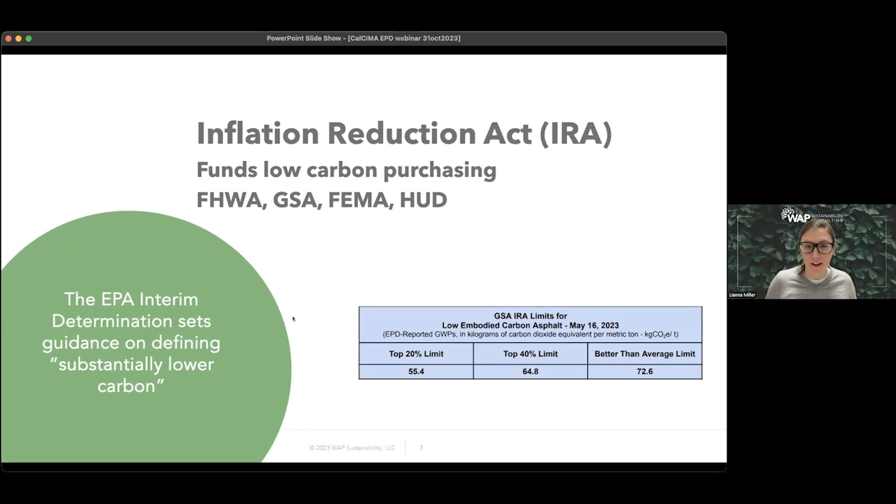Yeah, nailed it. Exactly. So let's talk about how you actually get data in. There's kind of two parts to this topic. I'm going to walk you through the Emerald Eco label for asphalt. And in order to participate in the benchmarking study, you only have to do the first part of it. Like, let's say the whole process is this long, you're doing just this first third. We'll walk through it specifically today. But first, just a little bit about the ecosystem of EPDs.

You've got these different ingredients going into products, pavement products. For an asphalt, you're going to have a binder and an aggregate. Now, ideally, you will have specific data about that binder or that aggregate. Like, okay, I have a nutrition label for my aggregate, right? I went to my aggregate producer, they have an EPD, I can put it into my own system and get a more specific number. You could almost think, if we're going back to that idea of the Snickers bar, gee, this is actually a pretty good one. So let's say that the binder is the chocolate and the aggregate is the peanuts.

Then you can use standardized data, which is what most folks have. It's built into the tool. But if you have specific EPDs, you can get an EPD specifically for the peanuts, right? For the aggregate, or you can use the average.

I have no idea why this went all the way to the end. So again, I'm sorry. Thanks for your patience. Hold on 30 seconds while I fix a technical issue. Okay, hopefully we are all seeing my screen again.

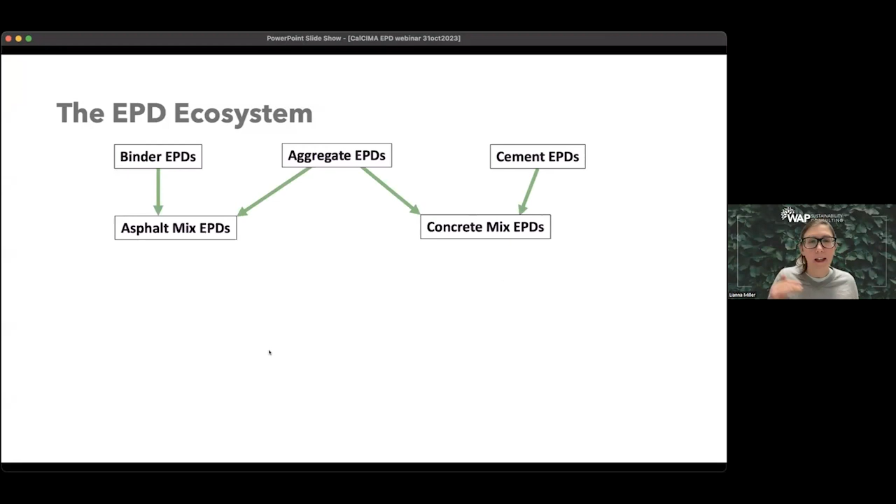Sorry about that. Okay, so what we have is this ecosystem of what goes into an EPD and where these all get used. I'm going somewhere with this, I promise, because the next thing is this data feeds into the different pavement materials which are providing EPDs, right? If you're being asked by your state agency or by FHWA to provide an EPD for a product, it's usually at this mix level product. Those EPDs are then, and this is where it gets fun, and you don't have to stress a whole bunch about it, but they go into a number of different databases.

Right now, asphalt mix EPDs are all available once they're published, and you choose when to publish. But once they're published, they're available on NAPA's site, and those can then get integrated into your DOT or your customer, whoever that is. And then they're making procurement decisions now at this point based on what they're seeing in the asphalt mix EPDs.

And so, Lianna, just a quick question. You said when they're published, so you can participate in the federal study without publishing. Oh, yeah. You can participate. What's our deadline on that? I believe that we are closing the second round of data collection... You know what? Let's just say the new year. And if I'm wrong, it'll be after that. There may be a little bit more time after that, but great. All right. Sorry to distract.

Oh, but no, please, that publishing thing is critical. I had several producers that wanted to participate in the data, but weren't ready to publish for whatever their business model reason is, which is always valid, right? Yeah. And that's okay. But getting the data in is what's important. They can choose when they want to publish later. So back to you, Lianna. Totally. Yep. I'm glad you brought that up. There is zero requirement to publish an EPD in order to participate in the benchmarking program. Things you don't have to do for the benchmarking program: you don't have to pay any money, you don't have to even be a NAPA member, and you don't have to publish an EPD.

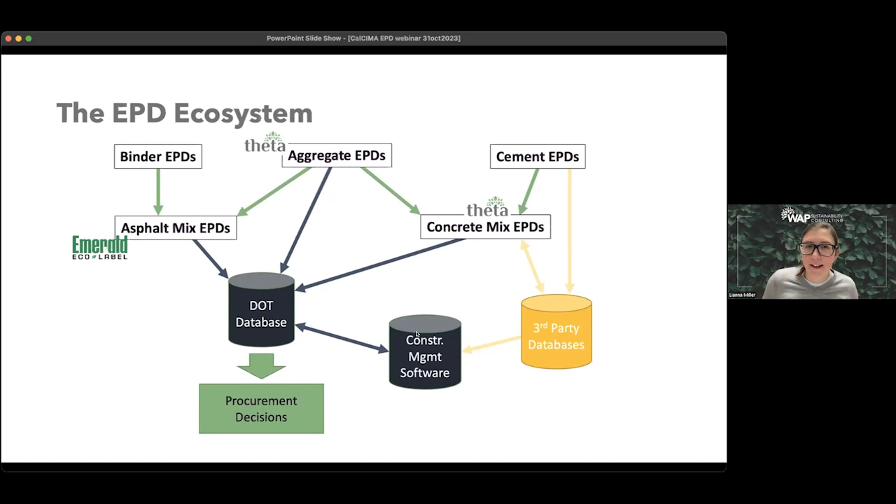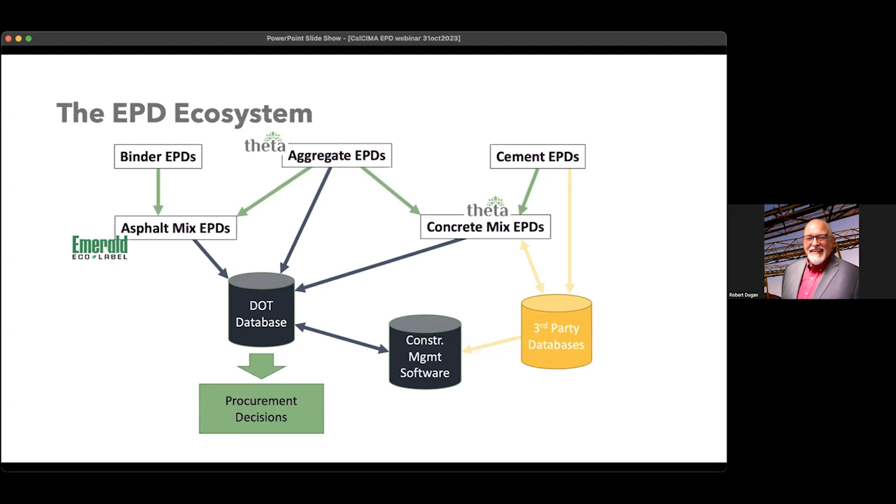But I'm assuming there are some folks in here that are from integrated companies. We do have a lot of fully integrated companies. For this webinar, we're focused on asphalt, but several of our companies are in all of the above. Well, cool. If you're in one of those groups, we can work with you on the other side.

So about the Emerald Eco Label, it is the tool to make asphalt EPDs. It is sponsored by NAPA. So they invested in this because they want asphalt to be able to make EPDs easily. It's pretty unusual that an association has created a tool, but it was a pretty good move on their part, I think.

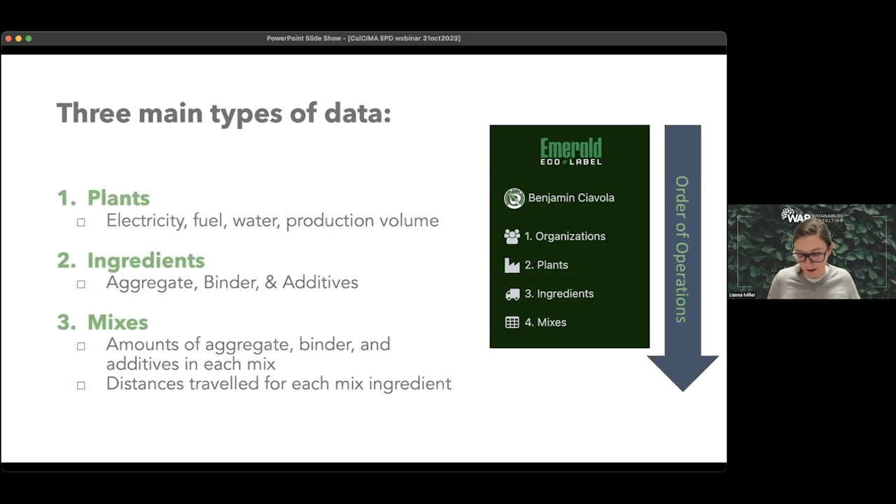So what we've done in making the Emerald Eco Label is we have done a bunch of iterations on this, simplifying the data input process to make it into terminology that you as an asphalt producer recognize, and using data you pretty much already have about your operation. You know, we're asking you for your fuel use, we're asking you for your energy use. You may have to dig around a little to get last year's numbers, let's say, but these are the kinds of things that you have. You don't have to go out and get a brand new measurement to get most of this put together. And we write it all in terminology that is familiar to you as an industry, and we don't ask any questions that we don't have to.

So there's that quote attributed to Einstein about just as simple as can be without being too simple, basically. I'm paraphrasing, but that's the idea, is we're going for that line of making it as reasonable as possible for you as an industry member, while still getting the appropriate data needed to do all the science behind this. But you do not have to be an LCA expert to do this, right? What you do need to know is asphalt operations, which you guys all know.

All right, so a little bit about when we're talking about the benchmarking side, why this big benchmarking effort. A little bit of life cycle terminology for y'all. We've got embodied carbon. This is a term that's been tossed around a lot lately. This is part of the total life cycle. So if we look at a life cycle of a product, we have its manufacturing, we have its transport, we have its installation or construction, we have its use, maybe some maintenance, more use, and then end of life or recycling, right? Embodied carbon is just the piece involved with the manufacturing, and upstream of it. So the ingredients that you use, what it takes to get that stuff to you, and then your production impacts.

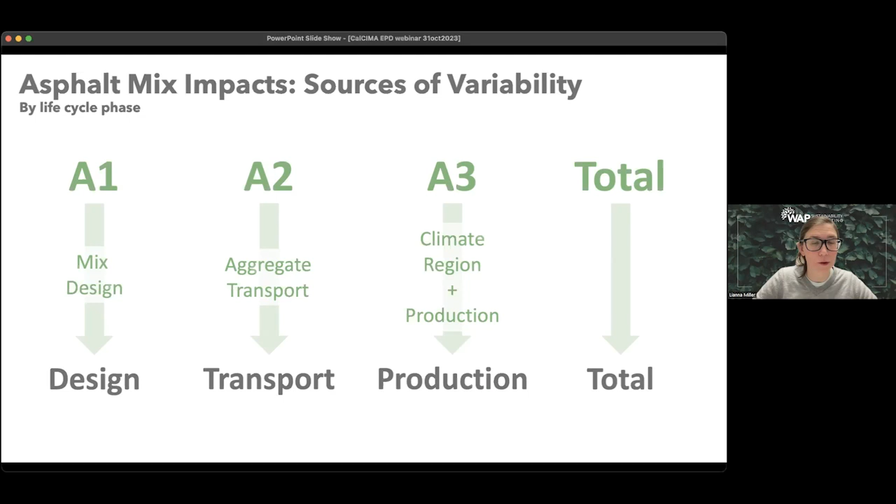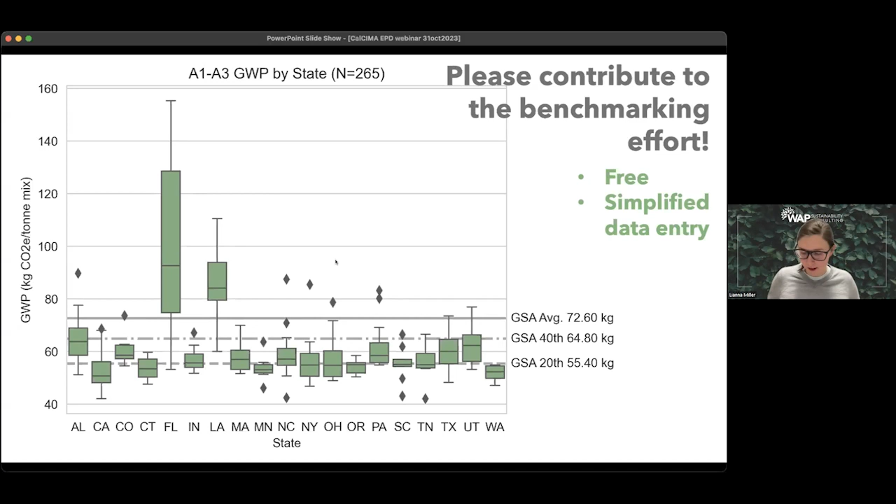It's because we have rules internally about when we have fewer than 3 participating organizations in a state, we don't visualize that data so as to protect specific data about an organization. So again, we have these limits in place to make sure that there's not a way that your sensitive data is revealed. Okay. So on to how one actually makes an EPD.

We follow this simple linear process of you enter information about your plant, your organization. That's kind of your metadata, right? Your company data, how do we get a hold of you, that sort of thing. And then it goes right into plant, and that's that fuel use, electricity grid, and so on. So all of that plant level data.

But what we are starting to do is, again, you saw it in that layout of the EPD ecosystem, we're starting to integrate specific EPDs from specific suppliers. And this is happening over on the concrete side with cement-specific EPDs, right? And they're including the specific cement supplier in order to create EPDs for concrete mix. So now we're doing the same thing over here. There's work happening on the asphalt binder side, and we're doing a lot of work on the aggregate side.

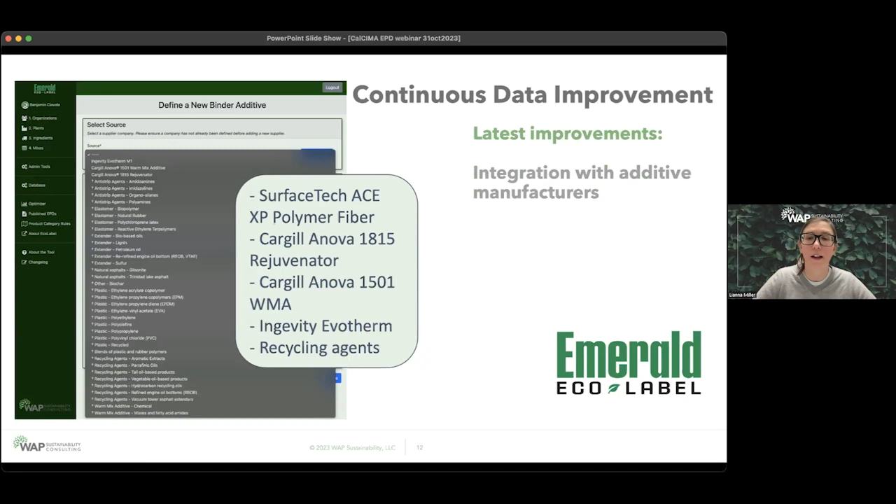So at the end of this, once you put in your plant data, your ingredient types, you put in the information about your mix, then you can preview your EPD and then choose to publish it. Once you choose to publish it, that EPD is verified.

There are additional quality controls within this whole system. Just to reassure you all, there is a lot going on in the back end to make sure that the data falls within normal bounds, that someone can't accidentally fat finger something. There's a lot of sanity checks in this, and then NAPA has a quality control assurance program as well. So if you publish an EPD, most of them are immediately available, but some of them may have to have a small pause while they go through the quality control program.

So, Lianna, if I could just ask a couple of quick questions. One of the questions we got asked is specific aggregate EPD data. So if you could slip that in as you go forward, that would be great. And then we know that in our industry, the oil industry has been a little bit slow to provide. So if you could address that at this point or somewhere in this part of your presentation, that'd be great.

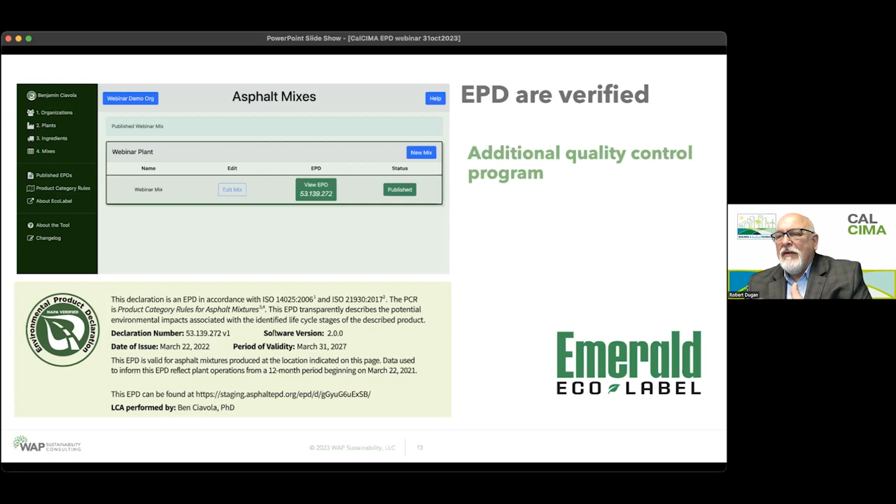Yeah, that is sort of the holy grail of the LCA world, is getting great data from petroleum products. There is a lot of work going on in there. It's imperfect, but what we do have is excellent primary data from the Asphalt Institute. They have provided sort of category data, if you will. So it's not product specific or terminal specific, but it is far better than just a generalized data set for asphalt binder.

So they've made a big investment of creating LCA data for several different major types of asphalt binders, notably SBS modification, and there's a couple of neat binders. So I will say we are all excited to have more data on that. But I am very glad that you brought up the point of aggregate EPDs, because this has been my project for the last 2 years. I'm very excited about it, so I'll talk about that next.

But first, I just want to point out a few things about the verification. Verification happens third party. This whole software is verified. It makes sure that all the data entry is simplified and follows the particular PCR. Remember those product category rules that NAPA put together? That all gets updated every 5 years. So we then go in and update the software so that your EPDs will automatically meet the new PCR requirements. So there is a lot of effort going on in the background to make sure the quality is there.

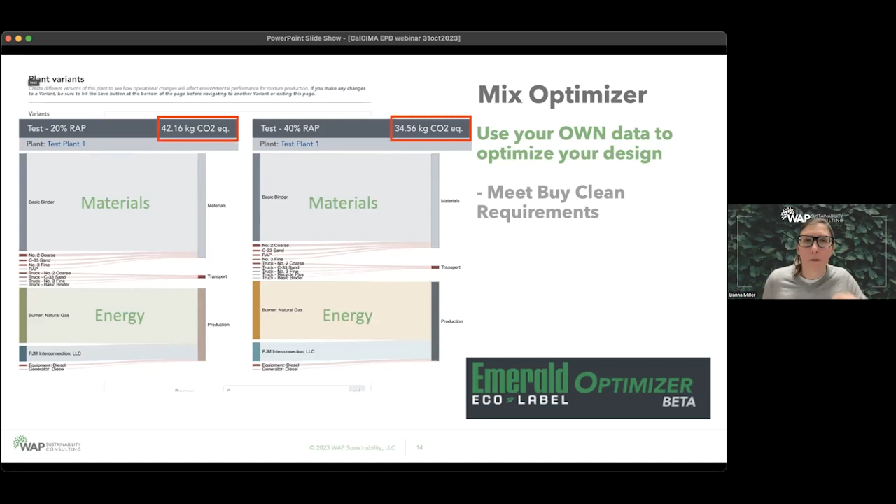So why do this? Especially, why participate in the benchmarking? It's free to you. It's a better picture of your industry. You don't have to be a member. Your data is private. The only person who can see it is myself and Ben. But you are participating in that transparency.

A ton of effort has gone into the upstream to make sure that this meets agency recommendations for, say, public data. This is a big thing with agencies. Public data, meaning those average data sets that we use, say for the binder, or maybe some average data sets for transport. Those are all public data instead of a privately owned database. A whole bunch of quality control and confirming that this all meets the product category rules. This is all built into the Emerald Eco Label tool.

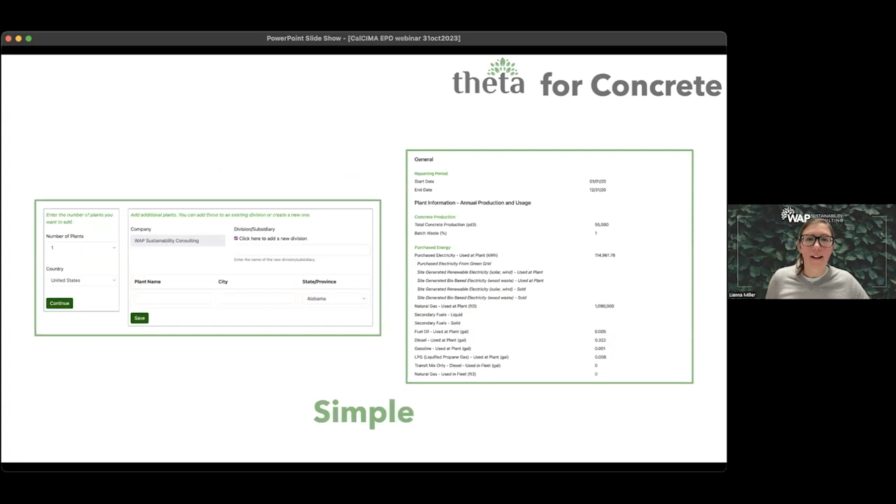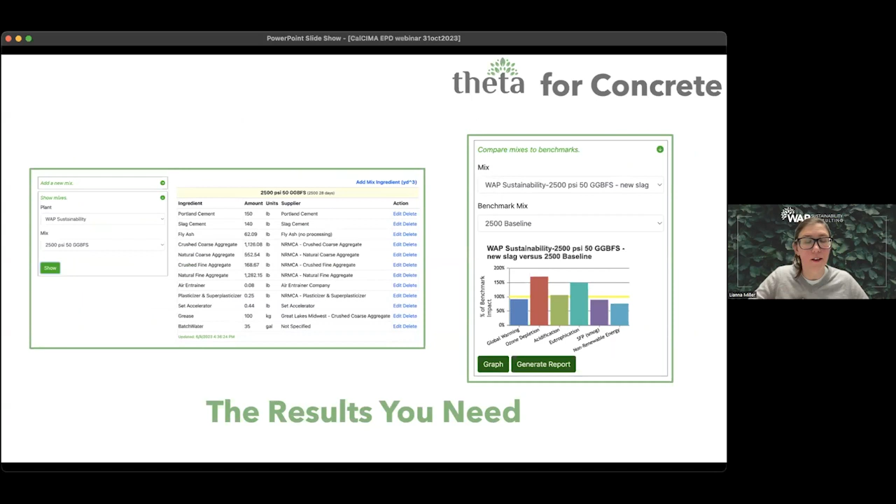Same thing for concrete. So my friends over on the concrete side, I stole their slides. But the idea is just the same. Again, putting in information about your operation. It's simplified. It's all in terms you know. You get out your results, your impacts associated with your mix design, in a format that folks are used to seeing. This EPD nutrition label, like right here. I love this image. This gives you an idea of what an EPD looks like, or at least the core part.

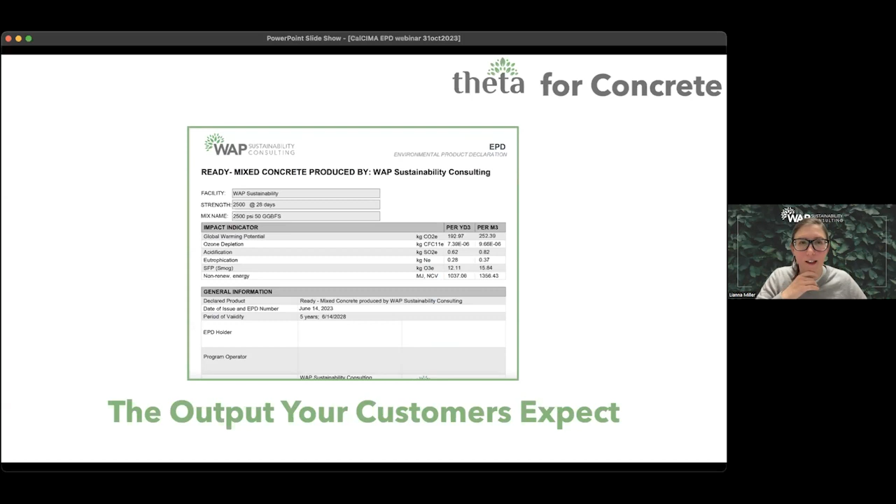This is that nutrition label portion of it. Global warming potential per unit of product. This happens to be concrete. I apologize, I should have included an asphalt screenshot as well.

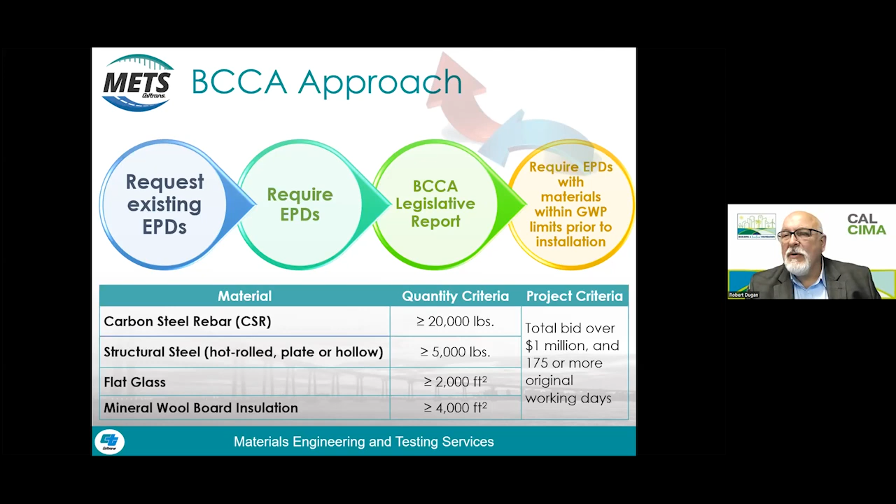Thank you, Robert. All right. So like I said, those materials aren't asphalt or concrete, but we like the approach. And so as we're looking at additional materials that we're adding, not legislated, just as a department looking to implement EPDs on our projects, we liked those approaches, those things we felt were successful, and we would like to continue that for any new materials that we incorporate into our projects.

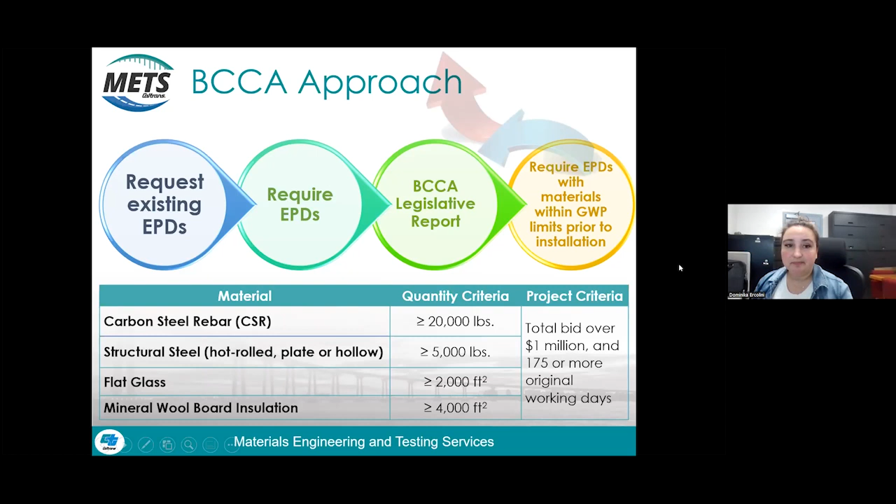Another thing that we would continue to incorporate from what we learned in the Buy Clean California Act is our data collection system. For those that aren't familiar, we have an online database called DIME. And that is where we currently collect all of our EPD data.

And there's really 2 times that a fabricator would go into the system. One, to input the EPD data, and the second time would be once they're actually doing quantity. So if they're actually shipping rebar, they put in their quantity and which EPD belongs to that. And so we would continue to do that with any new materials that we add as a requirement in our specifications.

So now we get into our 2019 pilot projects. In 2019, we did 7 materials. We did the structural steel, carbon steel rebar, mineral wool board insulation and flat glass, like in the Buy Clean California Act. But then we also added 3 materials: concrete, asphalt, and aggregate. Those were self-piloted materials, and they were selected because they're high volume construction materials.

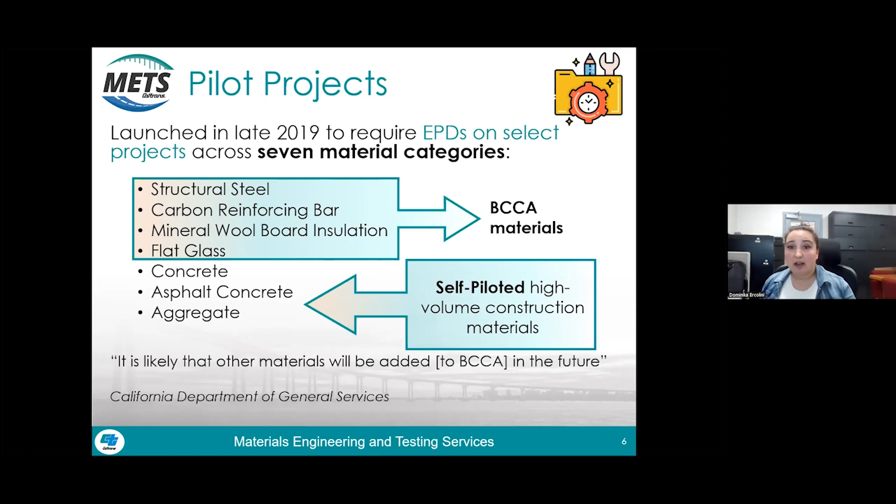And we also anticipated that if new materials are going to be added to the Buy Clean California Act, there is a pretty good probability that one or more of these materials would be the ones selected. So we wanted to get ahead of the game, figure some things out, pilot it, see what we learned. So we had 7 projects. 3 of them required concrete EPDs, 5 of them required asphalt, and 4 of them required aggregates.

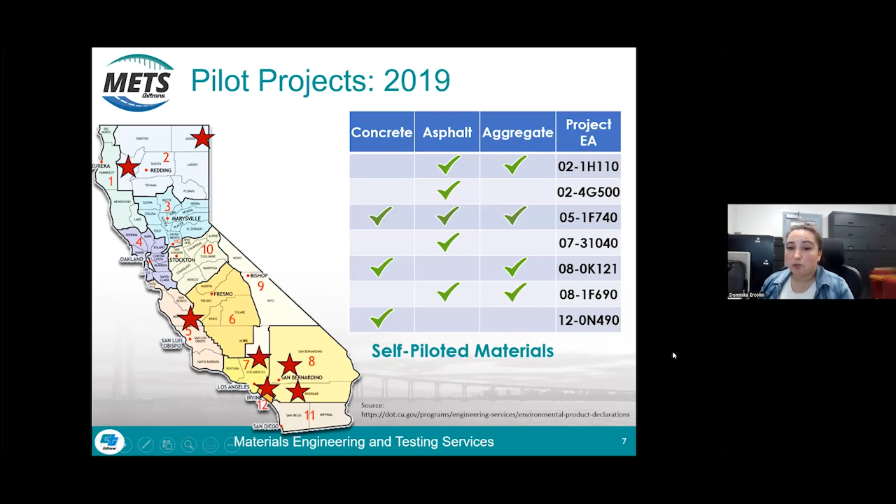And once we completed all those projects, we did a lessons learned. One of the first ones, data collection: we realized that each EPD can be different, each PCR is different, and so we had to adjust our DIME database systems and interface to make it as easy as possible. We had to develop basically special pages for each PCR for each material.

We also ran into an issue where we had a PCR that expired and no new one replaced it for about 3 months, I think it was. And we don't really have any kind of agency that oversees the development of these PCRs. So we really are subject to making sure that that PCR is up to date. And so we had to figure out what we would do.

And essentially what we determined was that if there's no PCR that's currently available, then we're not going to require EPDs for those phases. So if in the future anyone from this group ends up in that situation, that would be how we would handle it if that happens again. Roles and responsibility.

Keep in mind, this is 2019, and so we were in a different phase, but even contractors didn't even know what an EPD was. They didn't know where to find one. And so we realized how important the communication is across the supply chain. So we needed to make sure the contractor knew what they were supposed to do, the subcontractors knew, and the suppliers, as they're the ones that are providing the EPD. And so lots of communication. That's why we come out here to do these talks. That's why we talk on a project by project basis as well.

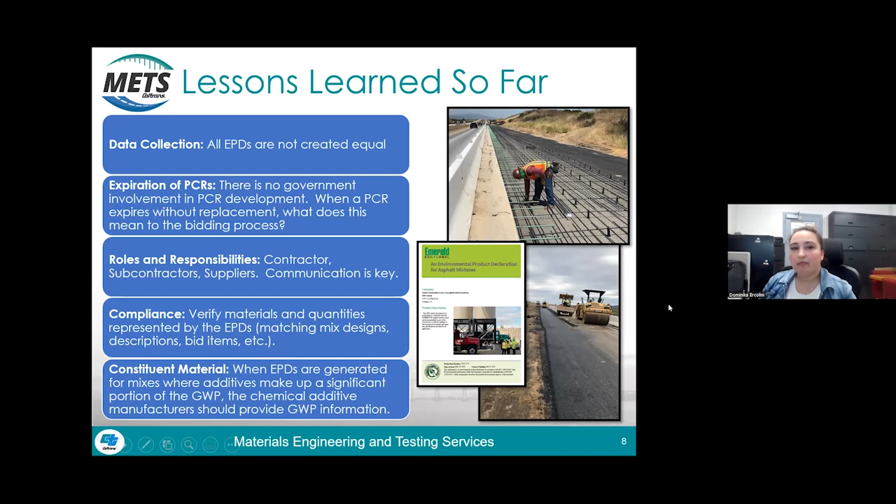So now we'll talk about Every Day Counts. For those of you that are not familiar with EDC 7, FHWA essentially every couple of years looks at and analyzes different innovations that are currently underutilized in the states, and then they give an opportunity for all the different states to participate in implementing these innovations into their state. And so Caltrans is participating in the EPDs as one of those innovations.

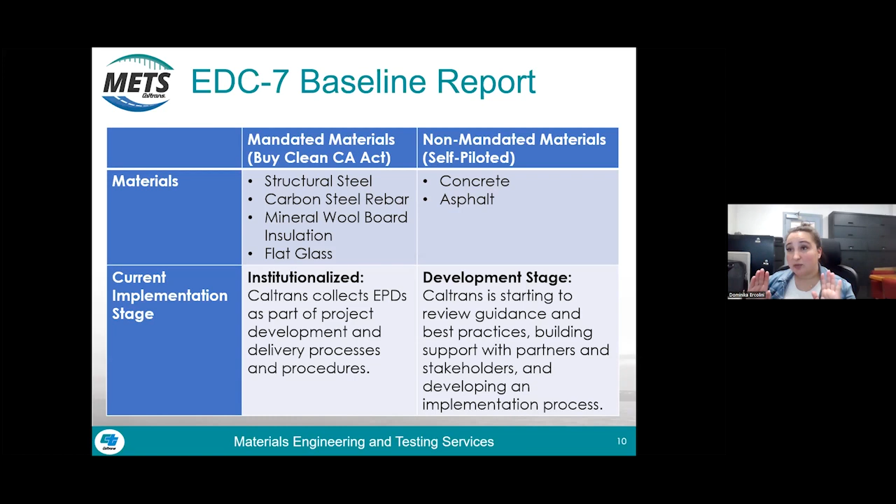And so we basically broke everything down into two categories. We have our Buy Clean California Act. We consider that completely institutionalized as part of our projects. And then we have our non-mandated materials. In this particular case, we're focusing on concrete and asphalt, and we're in the development stage. So that's the current status, where we're at right now.

And then for our self-piloted concrete and asphalt materials, there's a lot of items there. So we're going to participate in the FHWA Climate Challenge, and I'm going to talk about that more in just a minute. We're looking to develop specification language and how we can incentivize GHG reduction. The Buy Clean California Act has a limit, so it's either a go, no go. What we're trying to do is how do we encourage the reduction of emissions as opposed to just a go, no go? How can we encourage financially? And so we're looking at developing some draft specifications to figure out how we can go about that.

We also want to encourage the use of facility-specific raw material data. So, where does your aggregate come from? Where does your cement come from? Where does your binder come from? If those suppliers have specific EPDs, that's what we're really trying to encourage, the downstream materials. We want to support smaller businesses. That's going to be primarily through outreach and education.

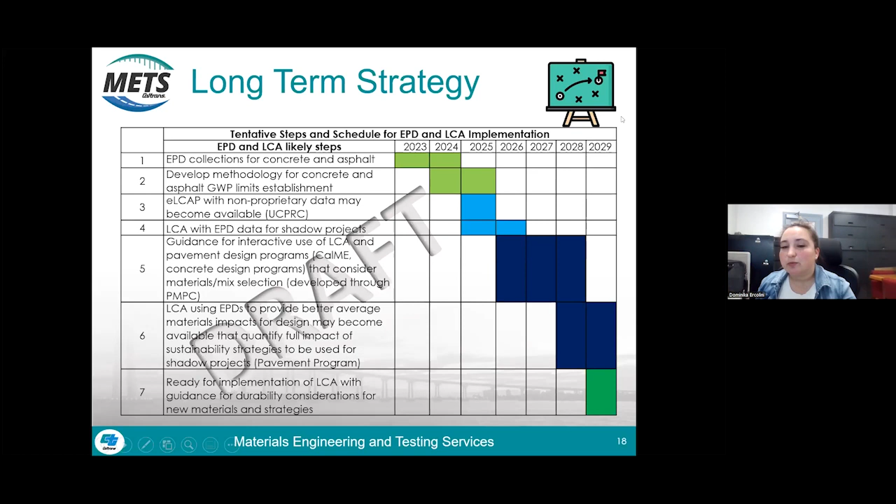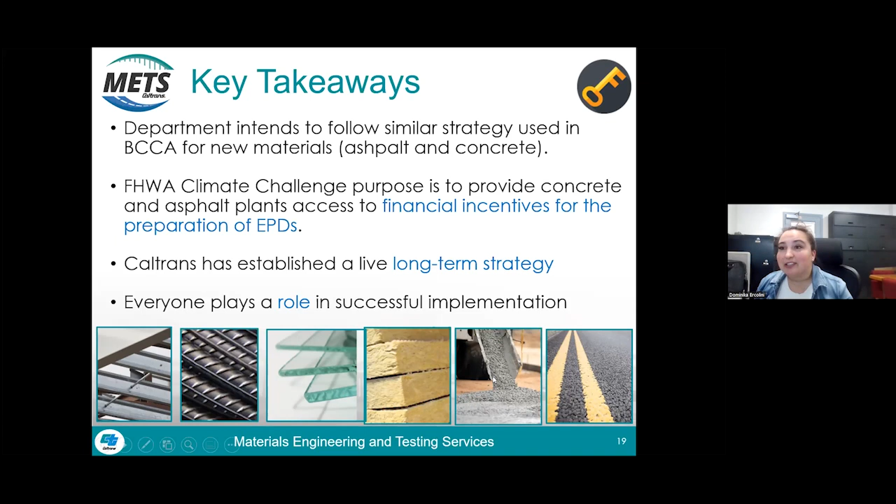So key takeaways. The department plans on taking the same strategies that we did with Buy Clean California Act for asphalt and concrete. We have our FHWA Climate Challenge that we plan on launching during this month. Caltrans has established a long-term strategy, and everyone plays a role in the successful implementation of this. As Robert mentioned earlier, it's going to take everybody involved in this.

So Robert, I think I took more time than I was probably supposed to, but at this point, I'll leave it up to you. Questions, whatever you want to do. Thank you. Robert, I don't know if you're on mute.

So I am. So we have a handful of questions that I think will help us really wrap around a couple of the outstanding questions on this. The first one was, you want me to just jump in? And again, I can't emphasize enough, the political perception is that we're behind. Our goal at CalCIMA is to help us reconcile that with reality and help folks understand that not only are we not behind, but independently, we've done a tremendous amount of innovation. And prior to any mandate, it's good for us to get in front of this.

One of the questions that often comes up, and I was sharing this with Leanne and Dominika before the call, was, there are those that can express a lot of concerns, but we need to get in motion and make sure that we have a mechanism to address those concerns. Our support last year for the legislation was that it would have put a lot of the details on the back end that we could reconcile through maybe the PMPC, right? Which is a partnership between Caltrans and the industry, so that as we identify some of those particulars, somebody like Dominika, who's heavily engaged in all of these discussions, and Leanne, as a member of industry, can help us reconcile and true those things up.